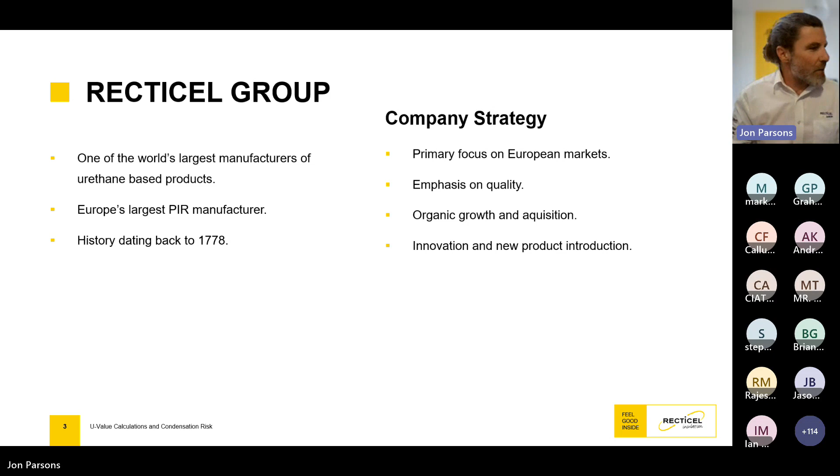The Recticel Group, we're actually Europe's largest manufacturer of PIR products. When I'm talking about PIR, it's the foam that's within these insulation products. Now, often when I'm doing these live presentations, I do like to ask the question, what does PIR stand for? If you just want to have a quick think, I'll come back to that one in a second. So PIR is the product that we manufacture, but depending on the facings of the board, that's what makes them suitable for different applications.

Now, Recticel's route to market, we don't go straight through. Oh, really apologise, my front doorbell is ringing, sorry. Really sorry, very unprofessional.

You can always rely on the Amazon delivery to turn up exactly the moment the presentation starts. Right, let me just compose myself again.

So, Recticel, Europe's largest manufacturer of PIR products, and we've got the largest presence of PIR products in the UK, so we're a very established company. Now, our route to market is through merchants and distribution. If you specify a Recticel product, your contractors can pick them up via, say, Jewson's, Travis Perkins. On the merchant side and distribution-wise, SIG, Minster, CCF, Encon, Galaxy, Markowitz. We've got plenty of distributors and merchants out there stocking and supplying our products.

Now, as I mentioned before, PIR stands for polyisocyanurate. And for that reason, we're still going to refer to it as PIR because it rolls off the tongue a little bit better than polyisocyanurate.

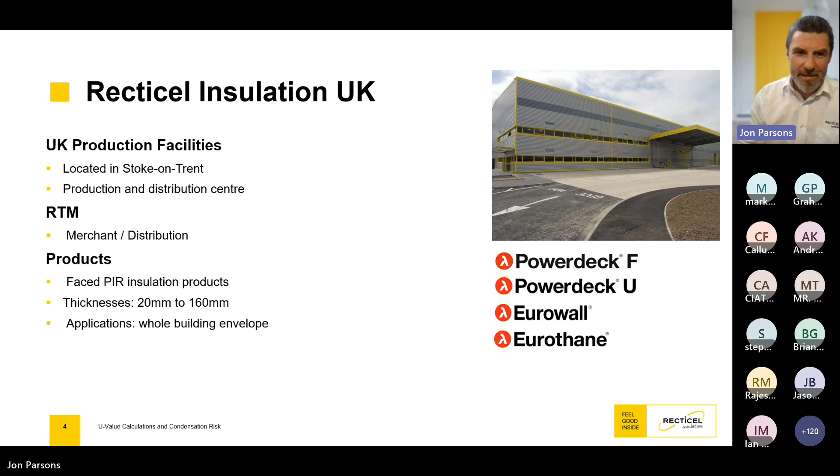Right, so what we're going to do today, we're going to look at U-value calcs and condensation risk. Just going to sip on a coffee.

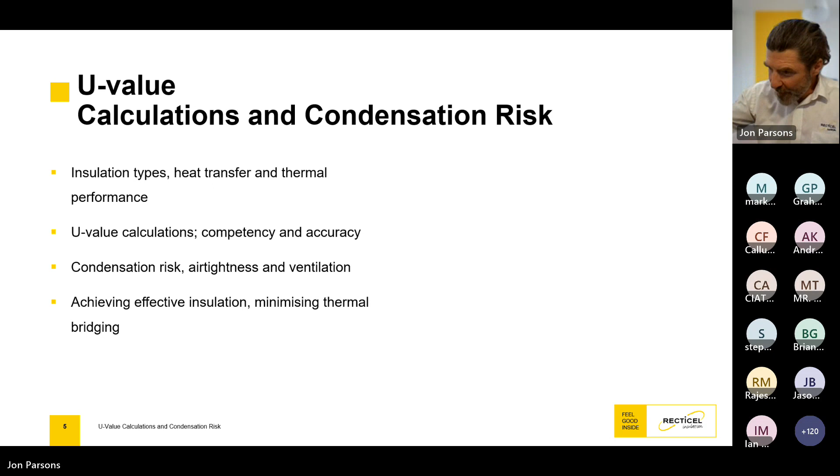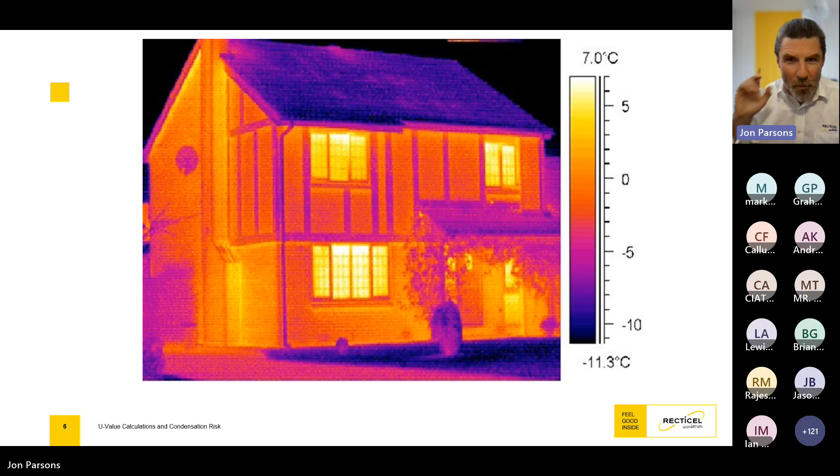Now, as I've mentioned, what we manufacture is PIR. And what does PIR stand for? Let's have a little think.

Now, there's plenty of other products out there which insulate, as well as polyisocyanurate. Sorry, can't see slides.

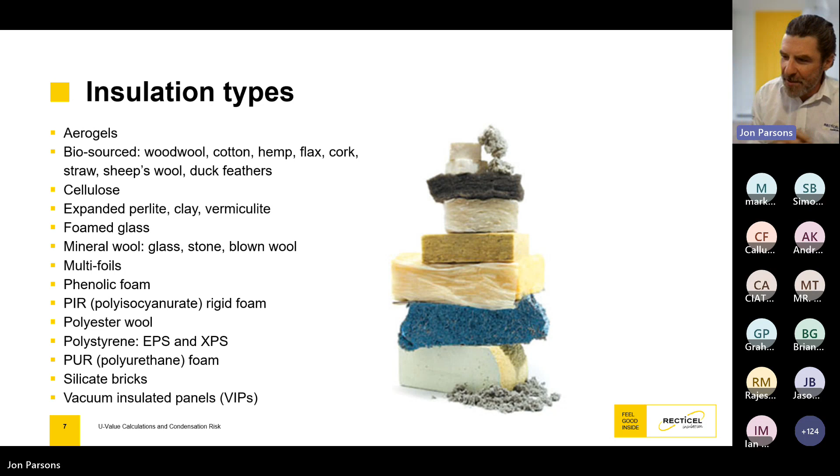Again, depending on which product you're looking for, maybe you're looking for a product with a really good compressive strength, maybe you're doing a car park floor or something, so maybe then you'd be looking at a polystyrene-based product. A typical KPA of a PIR product would be about 150. Polystyrene-based products can be anything from sort of 300 to 700. So again, just making sure that you use the right insulation for the right application.

So why do we insulate buildings? I think there's a lot of people on site who haven't got a true understanding of why we're putting the insulation in, because it does need to be put in correctly for it to perform correctly. It's a very important part of the build, and also a very expensive part of the build. So it makes sense to put the products in correctly.

Now, obviously, these two products here, if they're going together, need to be butted up. They need to be nice and tight in order for it to work properly. Otherwise, it's like buying yourself a really expensive snowboard jacket, getting to the top of the mountain, questioning why you're still cold, and then looking down, realizing your zip's undone.

Zipping it up, putting your hood up - that works better. If the building isn't wrapped up, these three key points are worth remembering. This will improve the energy efficiency of any build: continuous insulation, reducing thermal bridging, and improving air tightness. Regardless of whether you're insulating a little outhouse in your garden, building a house, or building a commercial building, those three key points will improve the energy efficiency of any build.

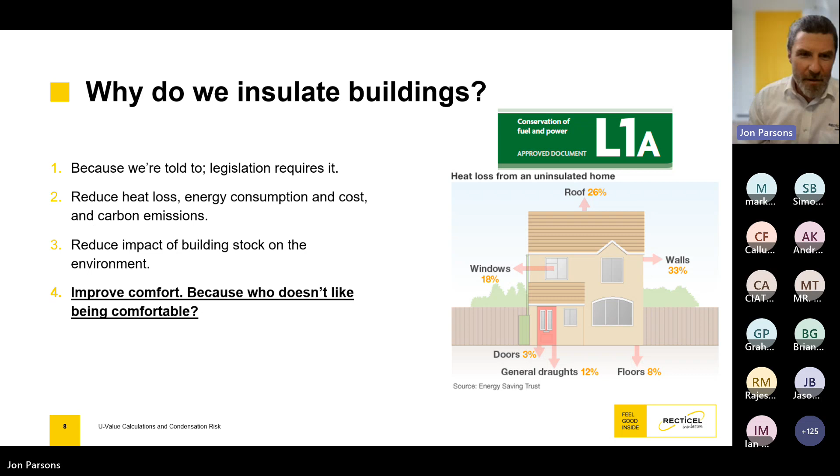Now, if we go back to basics and look at how heat actually moves, you've got conduction. Well, let's start with convection actually - how heat rises, hence the importance of insulating the roof or loft of a building.

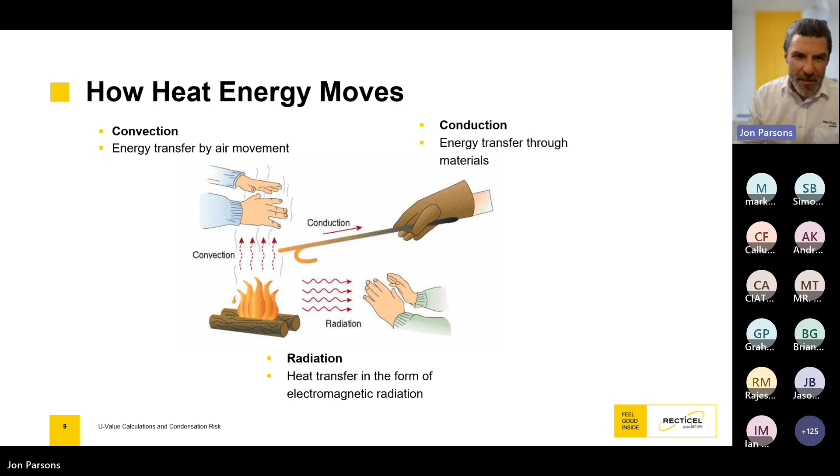We've got conduction as well. That's what we're going to look at in more detail, because different building fabrics on site have different conductivity, and it's very important that where products such as steel are used with very good conductivity, the detailing's done round so we can box them off and separate them from the rest of the build. Otherwise, you can create a lot of thermal bridging.

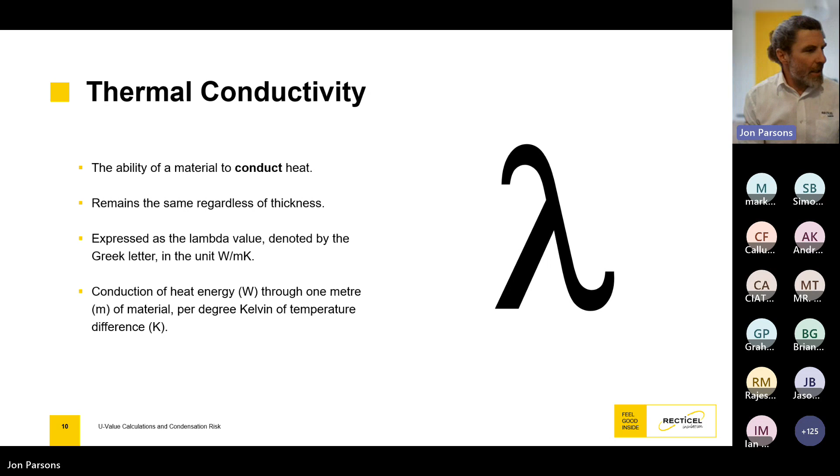Now, thermal conductivity, sometimes known as K value, more often now known as lambda value, is measured in watts per degree Kelvin. Basically what we're doing is looking at the temperature difference between one side of the material through a meter and the temperature difference on the other side. So it's temperature difference on one side through a meter compared to the other side, measured in watts per degree Kelvin.

Now, a quick rule of thumb for lambda values, U values, psi values - the lower, the slower. The lower the lambda, the slower the heat's going to pass through that product. The lower the U value, the slower the heat is going to pass through that build-up, through that system.

If we look at steel, for example, I've mentioned that a standard PIR, like this, a foil-faced PIR has got a lambda value of 0.022. If we look at steel, steel's got a lambda value of 50 - massive difference. Steel is a very poor insulator, but a very good conductor.

Also looking at different areas of the build, if we look at the block work - let's say you've done your calculations and the U value, maybe you're trying to achieve a 0.18 U value, but you've actually only achieved 0.19. Potentially, if you use the dense concrete block, which has got a lambda of 1.2, if you were to change that to a lightweight block, which might have a lambda of 0.15, that might just tweak it and put you over the line, and then you might achieve a 0.18. So there are little subtle changes you can do with the build if you're just marginally out with the U values.

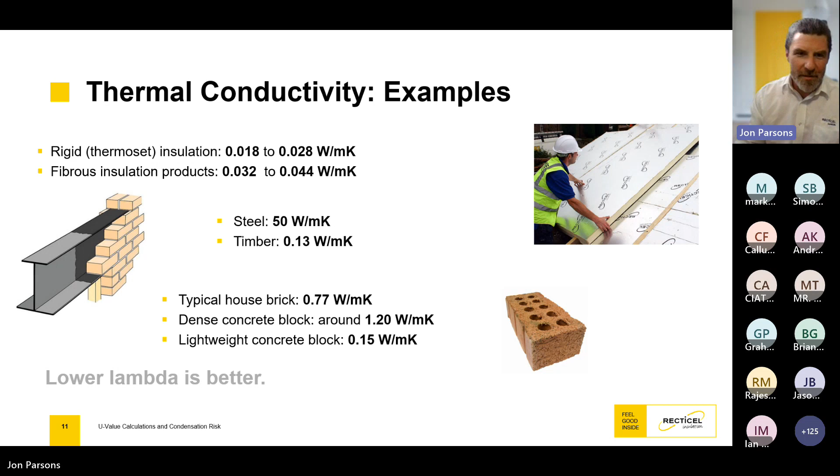Now, the resistance varies because the U value - what I didn't say, looking at lambda value, let's say you had 50 mil of product, that would have the same lambda as 100 mil, that would have the same lambda as 150 mil. So the lambda would stay the same. The resistance, however, varies - for example, this would have more resistance than this. So because it varies, there needs to be a calculation. If we had 110 mil of PIR with a lambda of 0.022, you would do 0.11 divided by 0.022, and that would give you a resistance of 5.

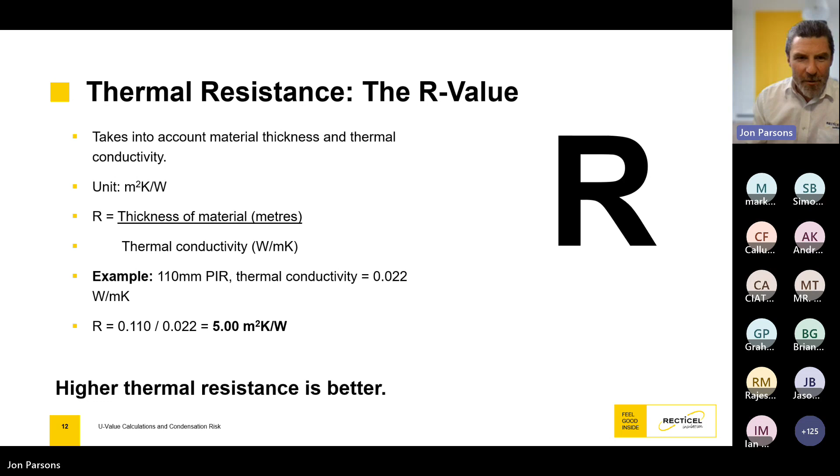Working with that resistance of 5 and comparing it to different building fabrics on site, if you wanted to get the same resistance as you would get with 110 mil of PIR with block work, you would need about 6 meters worth of block. Or maybe more relevant, because we only have to think back 100 years when we were building houses out of solid brick, you would actually need nearly 4 meters worth of brick to give you the same resistance as 110 mil of PIR.

Unless we're going to go back and start designing castles again, we need to be looking at the insulation. Timber, you'd need about 6 times as much timber and about twice as much mineral wool to give you the same lambda, or same resistance as 110 PIR.

Actually, if this was flipped on its side, it'd be a nice little graph, just so you can see the difference in the resistance of the properties and products that I've mentioned.

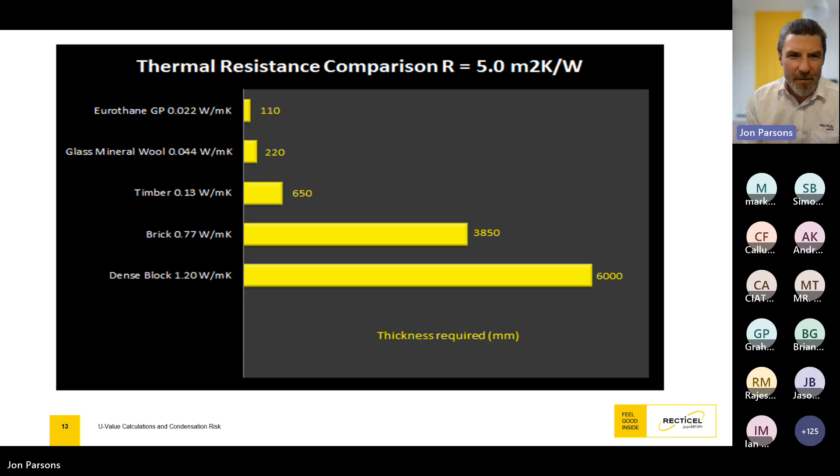Now, looking at thermal bridging again. We know that timber will lose heat about 6 times faster than PIR. When you get a timber frame house, roughly 15% of a timber frame house is timber. So that's 15% of the house losing heat 6 times quicker than the rest of it. So either that needs to be calculated, or attention to detail.

Maybe what you could do, if you have done that sort of design, is get some insulated plasterboard and run that across the front of the studs. That way you're going to have continuous insulation, you're going to reduce the thermal bridging, and you're going to improve the air tightness. So those 3 key points I've just touched on are going to be worked on if you do that attention to detail with the insulated plasterboard.

Now somehow on my screen is so small. I just need to adjust this slightly, because... there we go, I can read it now.

So let's say we had 140 mil PIR between the studs, then that 140 mil PIR would have a resistance of 6.35.

Taking into account the thermal bridging that those timber studs are doing, that 6.35 would quickly reduce down to 5.55, meaning there'd be an overall reduction of 12% within that build. If the attention to detail, like continuous insulation on the outside of the studs, isn't there, you would need to allow for a 12% reduction. So obviously that house wouldn't perform as well as it potentially could without reducing that thermal bridging.

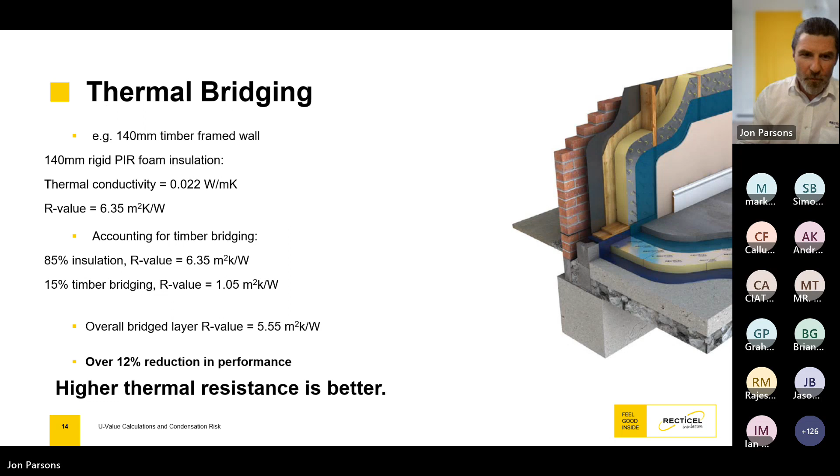I'm just going to let you have a quick read through that section there, what we've just covered, whilst I have another sip of my coffee.

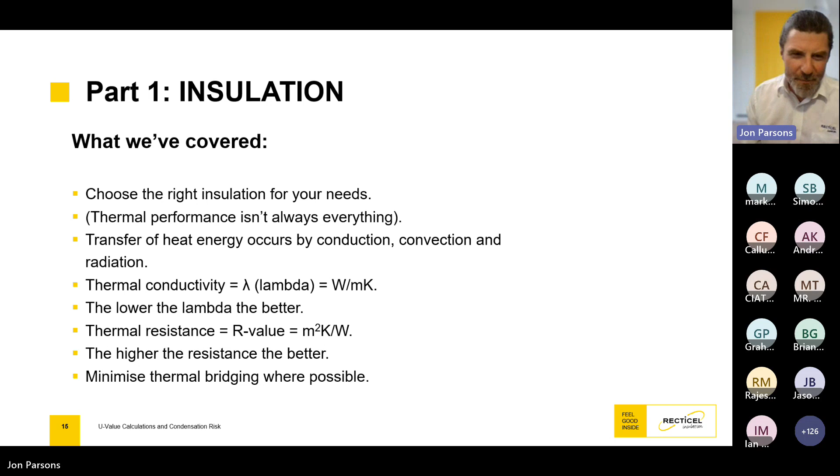So moving on to section 2. Once we've looked at the resistances and the lambda values, we're now going to look at how you arrive at the U value. Working with your resistances, going from the inside to the out, what you would do is mark down all your resistances, so the plasterboard, the dabs.

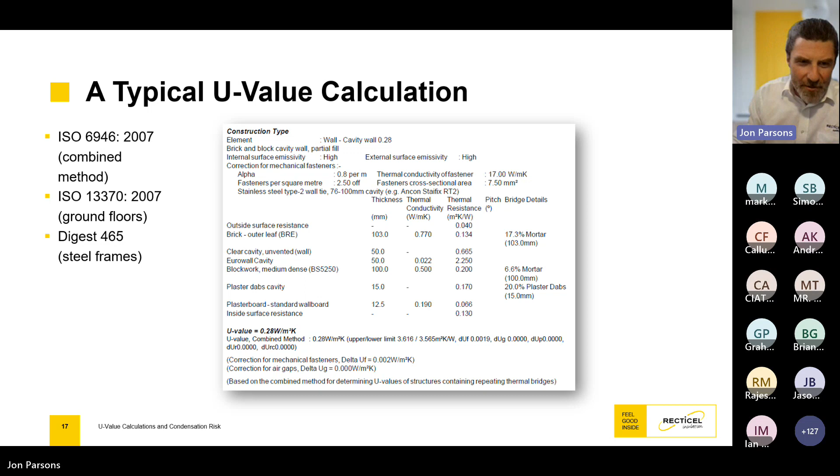Also, a wall like we've just looked at would give you a U-value of 0.28. But if I go back to that slide, we should now be trying to achieve a 0.18 within a wall. So potentially, if you wanted to stick to this same design of a 100mm block, 100mm cavity, 100mm brick - an overall width of a 300mm wall - rather than changing the design, you could just change the specification.

So rather than going down a partial fill route, where you've got 50mm insulation and a 50mm residual cavity, you could use our Eurowall Plus product, which is a rigid full fill. Because it's got the tongue and groove on it, you no longer require a 50mm residual cavity - with ours, you've just got 10mm. That means you can put 90mm product in a 100mm cavity. You've stuck to exactly the same design, all you've done is a specification change, and you can now achieve a 0.18 rather than a 0.28, just from a spec change rather than a design change.

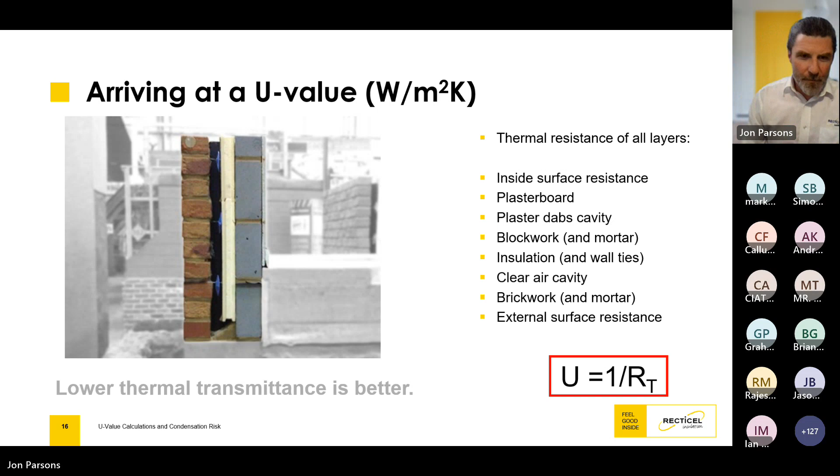Now, I'm not sure how most of you do your U-value calcs. You might well use a SAP assessor, you might have your own software, or quite possibly you go to one of the insulation manufacturers - ourselves, Kingspan, Celotex, or one of the others out there.

Now with us, you've got two options. You've got the formal one, which is done in-house. One thing I will say, the guys in our technical office are really responsive. I've heard horror stories from other manufacturers taking several days, if not a week or two, to get back to you just with a U-value calc. I'll put my neck on the line here and say that generally speaking, within a couple of hours, certainly within the same day, but generally within a couple of hours, you'll get your response from our guys.

A couple of the people in our technical office are also part of what's known as the BBA Competent Person Scheme, which means they've done exams, they're approved, and they can give the correct information out to you guys. To keep them on their toes, being part of the BBA Competent Person Scheme means the BBA can pick up any of the info we're giving you guys at any time and double check it to make sure we're giving correct info. So before we send any info out, we check it, double check it before we send it - rest assured it will be correct. And if you want project details, we can include that on the top, and you can get a BBA stamp on the bottom, like a little certificate.

We've also got a U-value calculator online, which is very easy to use. What became clear to me straight away when I started this role about 6-7 years ago was that about a third of architects who logged on to do a U-value calc logged off, because there was a requirement to put a username, password, project details, client details. All I want to do is find out how much insulation I need to put in a cavity wall to achieve a 0.18 - so none of that information is actually required.

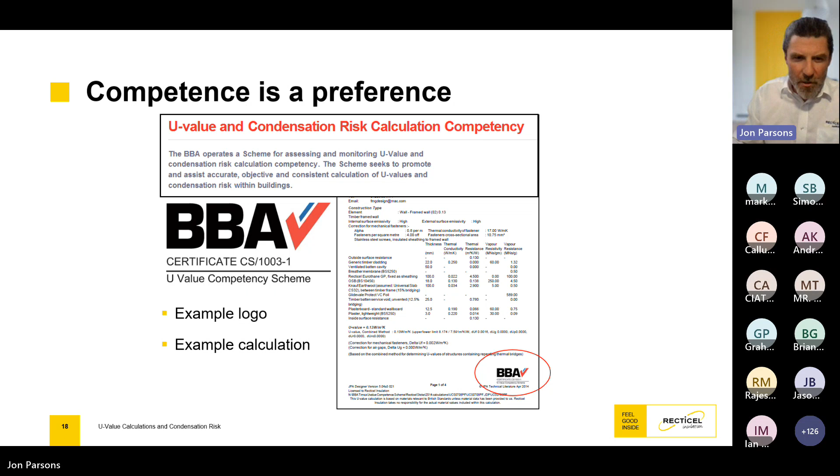You factor in project locations. When we're doing condensation risk assessments, we look at where the project would be. For example, it might be different if it's based in Scotland compared to London, but the U-values, I think, are pretty much the same, though condensation risks can change.

Just finishing off my coffee whilst you catch up on section 2. I really don't like cold coffee.

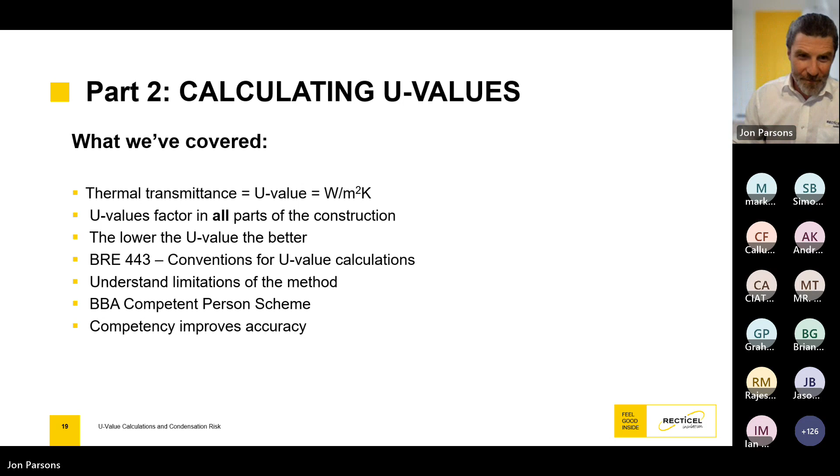Right, section 3. So ventilation and insulation need to go hand in hand, because when you very well insulate a building with continuous insulation, reducing thermal bridging, improving air tightness, you're retaining the heat you've paid for, and in turn you're making the air within that building warmer. The only issue with warm air is the warmer it is, the more moisture it can hold.

Potentially, if you haven't got very good ventilation, what happens then? Let's say this is your window. The window might not be as warm as the walls. So as that air floats around, as it gets near the window, the temperature drops, gets to what we know as the dew point. When the dew point's been hit, that moisture condenses, it lands on the surface as condensation, and potentially can be an issue.

So with new builds, as we're wrapping them up in an airtight envelope, ventilation's absolute key. With older buildings, it's not so much of an issue because you've got lots of natural ventilation - big open chimney breasts, windows and doors that don't fit or shut properly. The good thing about that is the moisture's carried out. The bad thing is so is the heat you've paid for. So there needs to be a happy medium.

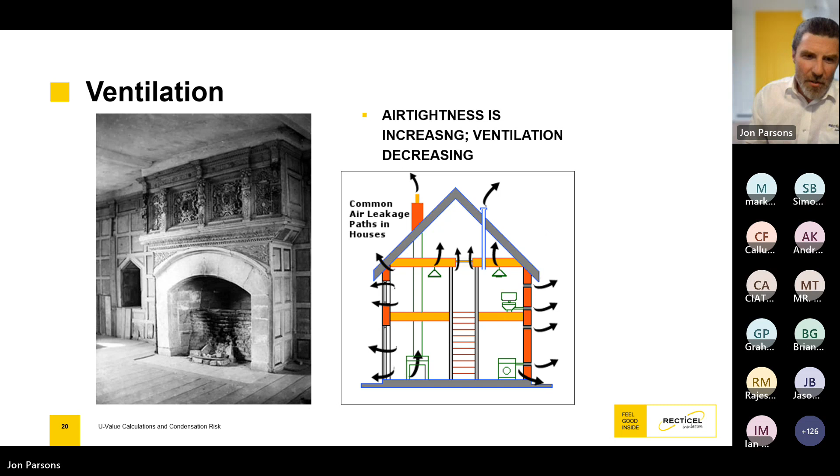So when we look at condensation, in my eyes, you get good condensation and bad condensation. Good condensation can be found on the outside of a beer glass, or it might be a glass of Prosecco, or just a fizzy pop out of the fridge. In my eyes it'd be an extra cold Guinness, but that's just me. The theory's exactly the same.

Now that you've got your glass, you've got a cold liquid inside, the outside of the glass can now be the dew point, and any moisture in the air, once it hits that dew point, condenses - that's where you get the little droplets on the outside of the glass.

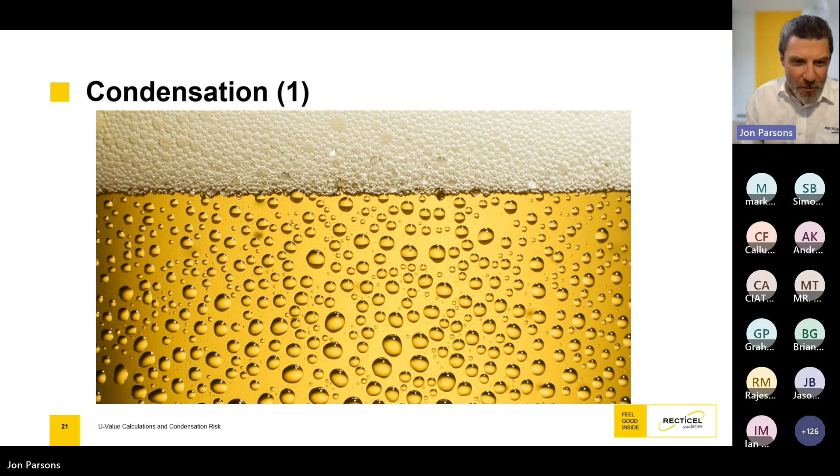Also, it may be on a timber frame structure. Now, timber is air permeable, so if the detailing hasn't been done well on, let's say, a vapor controller - maybe the vapor controller has not even been put in - then that air is going to work its way into the timber. Somewhere within that timber is going to be the dew point, and that can lead to interstitial condensation, which is condensation working its way from the inside out. And unlike a lot of damp issues, by the time you can actually see the problem, a lot of the damage has already occurred.

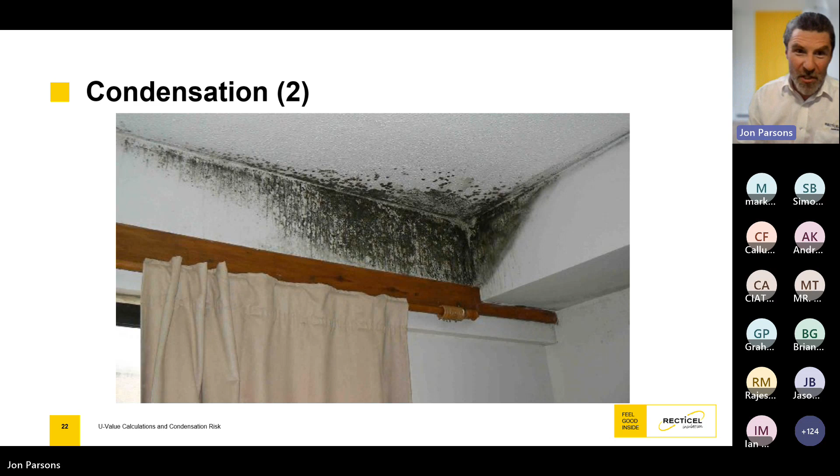So a vapor controller is a physical barrier. It stops the moisture getting into the structure. And if detailed correctly, it also doubles up as an air tightness barrier as well. So let's say you had two walls where you had air tightness barriers or vapor controllers - make sure they overlap, make sure they're taped, make sure they are kept nice and airtight.

Now, I remember when I was about 18, 19, 2 or 3 years ago, maybe a little bit longer.

But nowadays, you're probably going to have 3, 4 or 5 light switches, and maybe 3, 4 or 5 double sockets. You're going to have air conditioning sockets, data cable sockets. That wall could be absolutely hacked into, and then it's not going to do the job of a vapor controller or an air tightness barrier.

So what you could do is drop little battens down, maybe 25 or 40 mil, fixed onto these studs, creating a little void, and put the plasterboard on that void. That way, someone like a younger version of myself could come along and hack into that wall as much as they like, tucking the cables down the back. The vapor controller stays intact, air tightness is kept to a max, and it works more efficiently. Obviously, while you're doing this, you also need to look at ventilation.

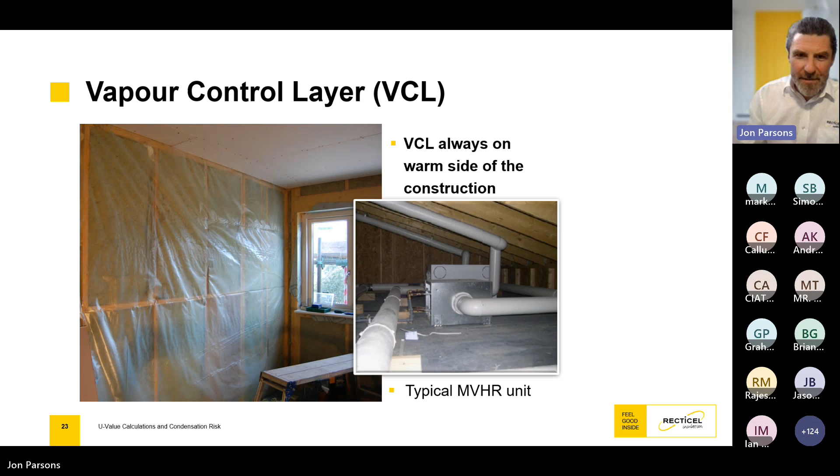You could just get trickle vents above the windows, but what I'm sure we're going to see more of moving forward is mechanical ventilation units.

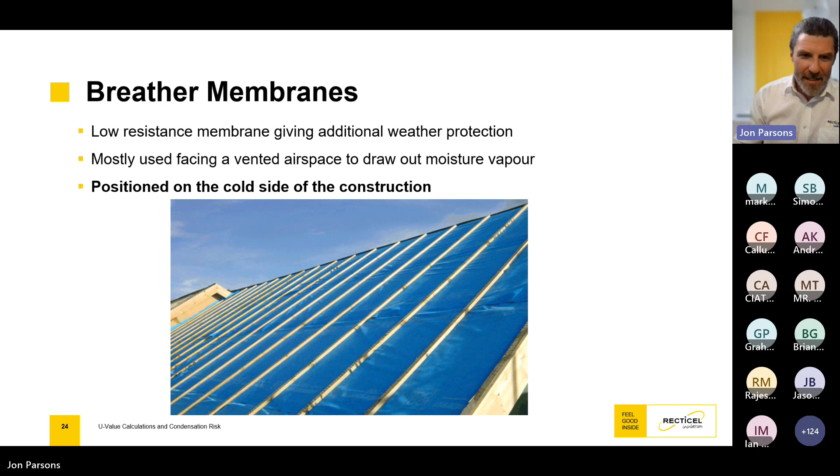Now, breather membranes - a vapor controller goes on the warm side and stops most of the moisture, but it's never going to stop all of it. You'd definitely put a breather membrane on the outside, because if you put 2 vapor controllers, the moisture that got through the first layer would be trapped in the structure and rot - the rafters and so on would start to rot. A breather membrane has thousands of tiny holes, large enough to allow moisture to escape, but small enough to stop rain from getting back in.

As I mentioned at the beginning, we've got a sister company called Gradient. Between Recticel and Gradient, we're doing a lot of these calculations because we work heavily on the flat roofing side. Now, the only flat roof that the BBA will recommend is a warm flat roof.

A warm flat roof means that if this is the deck, enough insulation is put on top of it, and what that means is the condensation point is pushed to the outside of the structure, so condensation is not a risk. It doesn't rely on workmanship, it doesn't require ventilation - it just means you need enough insulation on top of the deck, and that creates a very safe, reliable system.

Looking at this, if we had a single ply membrane on top, 120 mil of insulation, a vapor control layer - quick rule of thumb, the vapor control layer always goes on the warm side of the insulation, so here it would go underneath it. Then we've got a plywood deck, joist, and a plasterboard ceiling finish.

Now in red, this line is predicted temperature, and in blue we've got predicted dew point. The dew point is always relative to humidity. Because we've got a vapor control layer across here, that's going to stop most of the moisture. You can see the predicted dew point here is 15 degrees, but because of that vapor control layer, it knocks 10 degrees off, meaning it's not until it gets down to 5 degrees that the dew point is likely to occur.

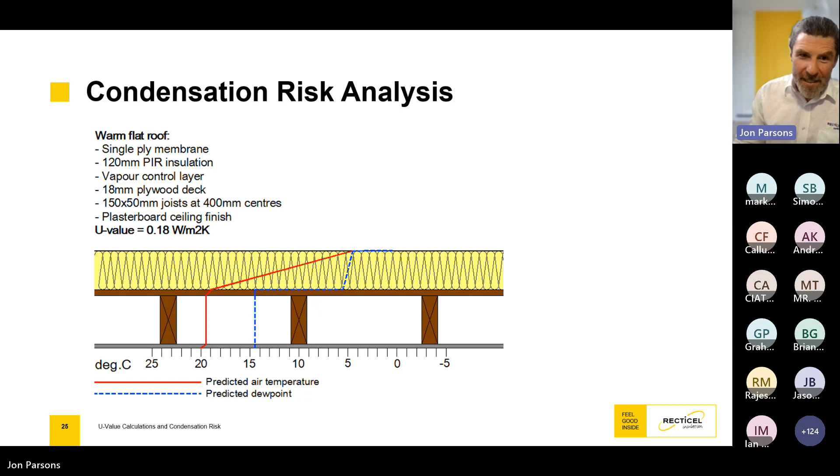So you can now see why people would be tempted to go for a hybrid roof. Let's say you've got a real thick layer of insulation and you're thinking, I don't really want that much insulation on top of the deck, maybe I can just put some below the deck.

So that could lead to interstitial condensation. Now, it could be avoided if you've got height restrictions on top of this deck. Just to give you an idea, if you were to use this build-up and use our Deck VQ product, which is our vacuum insulated panel, potentially 60 mil of this product could achieve a 0.17 on top of a timber deck like this.

More than happy to talk more about that. I can arrange CPDs directly with you guys, or you can just ask me questions after this event.

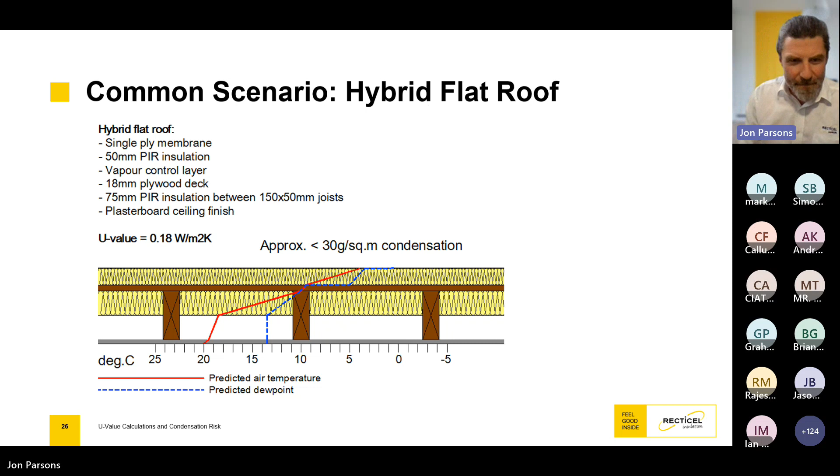Going to have another sip of water whilst you finish up on section 3. Then we've just got one more slide before I hand you back to Usman.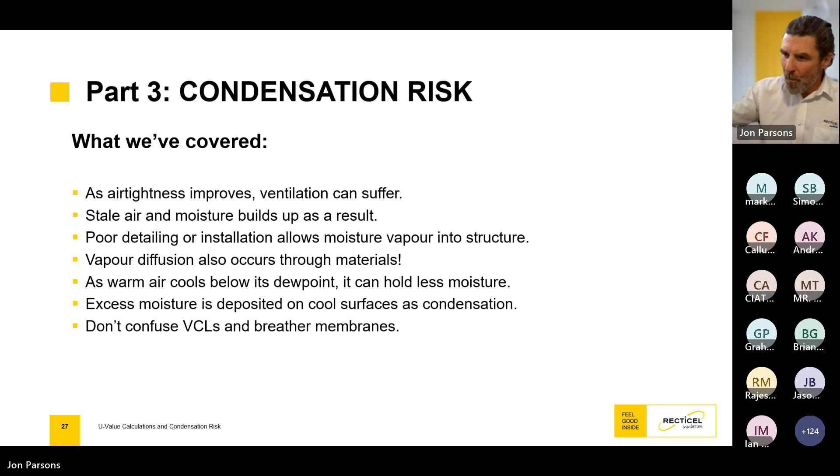So if we just have a quick overview then. Initially we looked at making sure you choose the correct insulation for the correct application. We looked at principles of heat transfer and thermal bridging, lambda values, R values and U values. We know that as warm moist air cools, it can hold less moisture and can lead to condensation on cooler surfaces. The correct positioning of vapor control layers, breather membranes according to basic principles, and calculation methods have limitations and use assumptions. Seek competency. So if you've got quite a complex build-up and you've used our online U-value calculator and you've still got questions, please forward me the information and I can get a more formal calculation done for you.

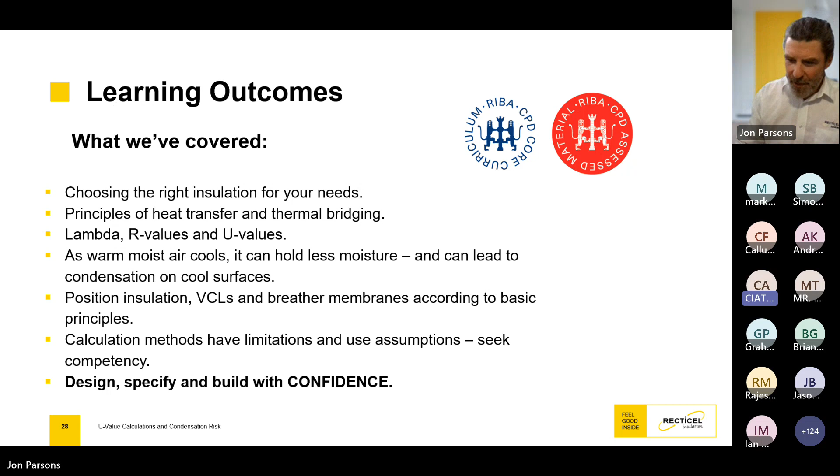Also, if you want a U-value calc done for the floor, we'd need to put a PA ratio, like a perimeter area ratio, in as well. So please always use me as your first point of contact. And if I can't answer the question myself, I can certainly go in-house back to our technical department and come back to you with a correct answer. And just for everyone, please design, specify would be wonderful, but more importantly, build with confidence. Thank you very much, everybody.